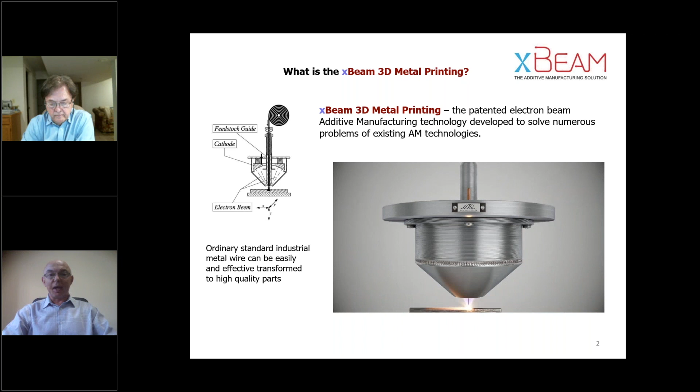Additive manufacturing was initially developed to swiftly make prototypes and design models. At first, only polymer materials, plastics, were used, and their properties were not favorable to real-world applications, even with shortened lead times. So development of metal 3D printing processes became the next milestone in the evolution of additive manufacturing. This opened an opportunity to produce prototypes that had basic properties close to the original parts, providing the opportunity to test prototypes under near real operating conditions.

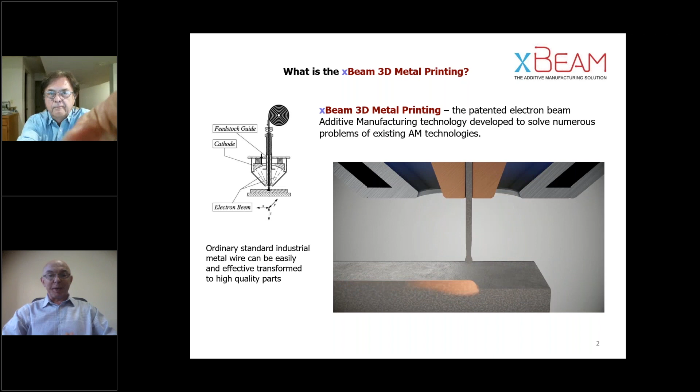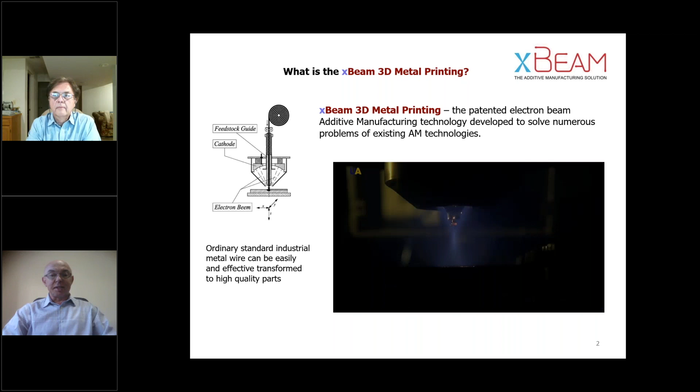Production of original industrial metal parts with lower mechanical properties and less stringent requirements began with medical applications like prosthesis and dental products. These accomplishments immediately generated interest in the more in-depth implementation of 3D printing to actual industrial manufacturing.

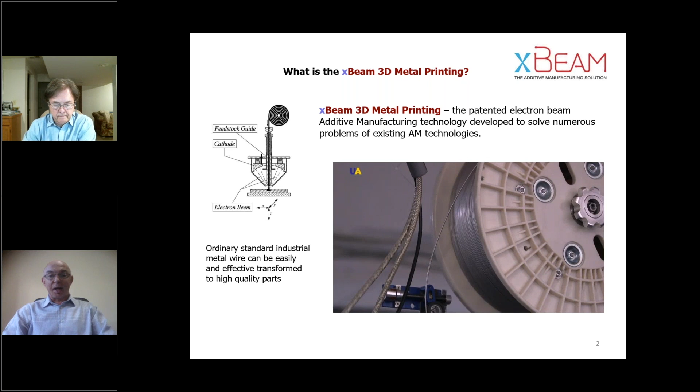Actual production requirements are completely different from prototyping requirements. Manufacturers need uncompromisingly high product quality, simple operation, equipment, affordable materials, and most importantly, reasonable production cost to compete with conventional production methods.

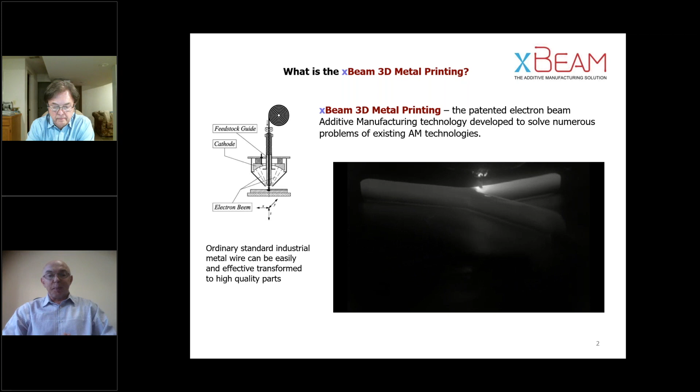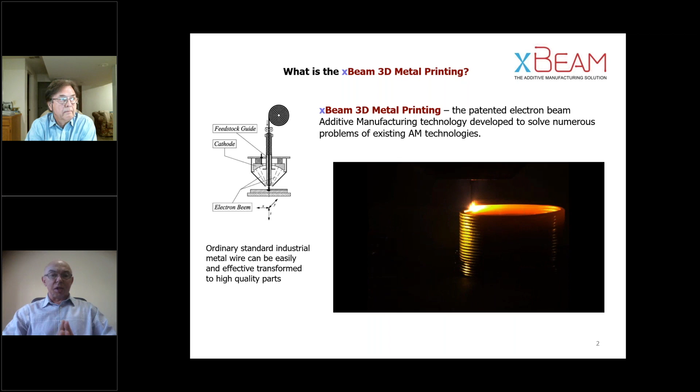Despite many efforts, it has become clear that most existing 3D metal printing methods are not close to meeting these requirements. One process has demonstrated excellent design capabilities, but only for small parts and with very low productivity. Other means show the ability to produce more significant parts with high productivity, but were rough, resulting in a great deal of post-processing. And most of the equipment and raw materials were very expensive, making these processes worthwhile only to a small customer segment where demand for complex shapes compensated for the extra high production cost.

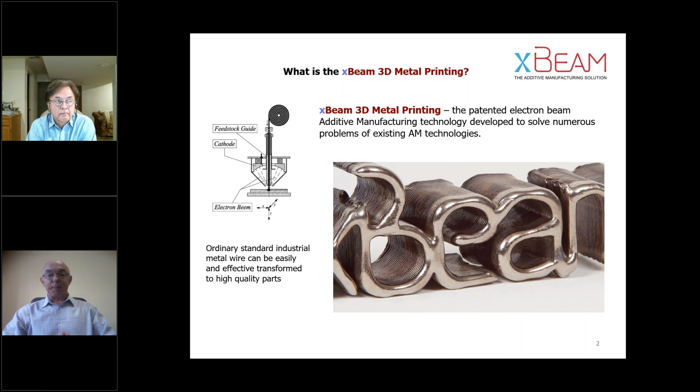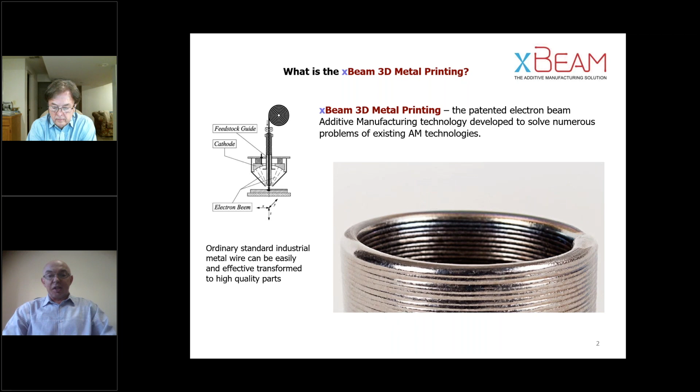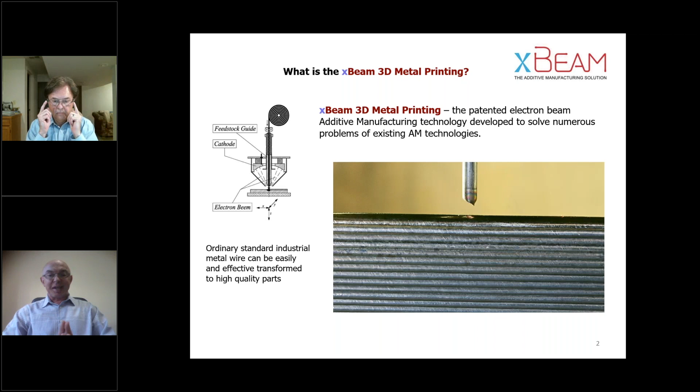From inception, xBeam 3D was developed to meet industrial requirements without compromise. With xBeam, you can take a conventional metal wire from the nearest welding shop, feed it to the system, and quickly produce a final part with good quality that requires minimum post-processing. We created our technology and equipment with careful thought on how it would fit into existing production chains and manufacturing ecosystems.

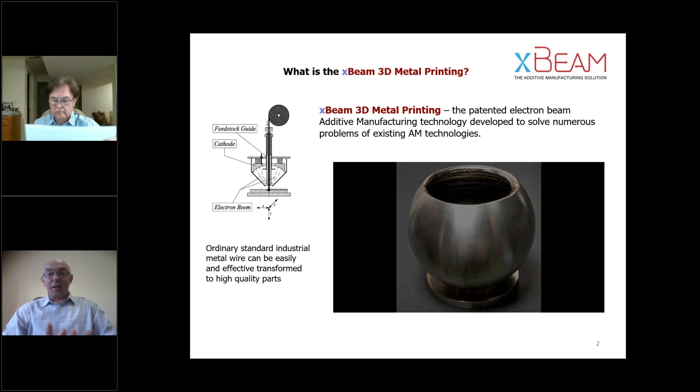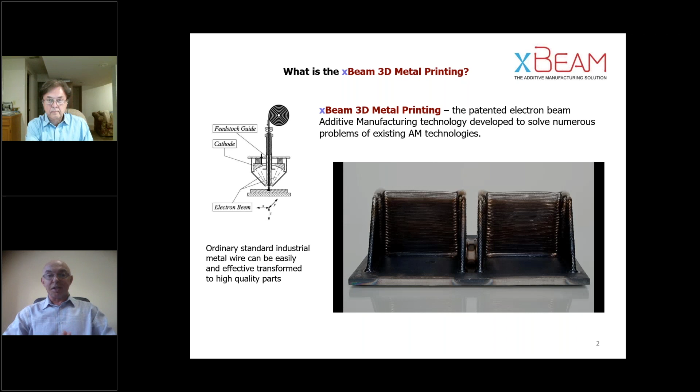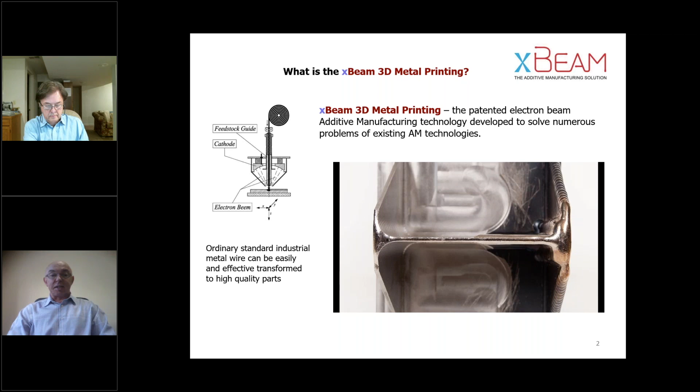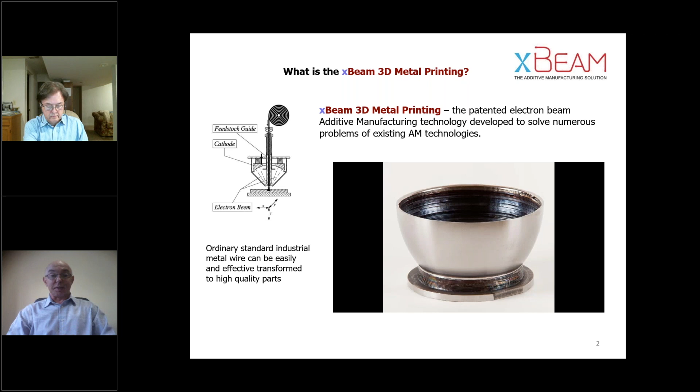Our systems can be operated by personnel with skills equal to that of a CNC machine operator, and 1 hour of operating an xBeam 3D printer costs about the same as an hour of running a CNC machine. Our core competency in the design and development of electron beam systems, combined with our experience in industrial metallurgy worldwide, resulted in the xBeam 3D metal printing technology that allows us to precisely and accurately deposit molten metal using standard filament alloys, producing a wide range of metal parts at a cost-effective price. Our main objective during the entire life of the project was to make equipment that would address the largest base of industrial customers.

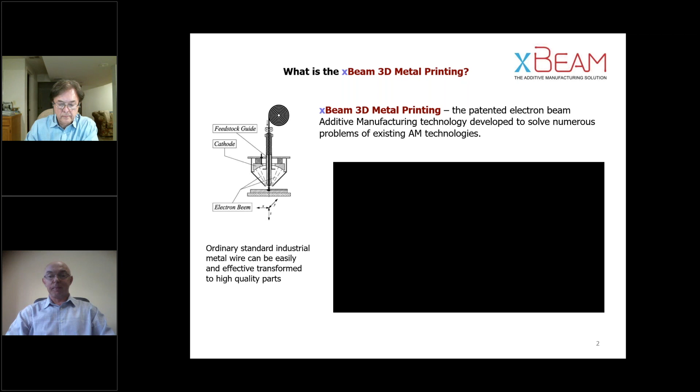Tell us, please, where you stand in the development cycle and who has validated your technology?

Since 2014, when we had only an idea, and until now, we have completely validated the viability of our technology. We have demonstrated several exclusive technological capabilities, including the capability to make high-quality parts which meet the highest industrial specifications. And we have tested and approved the main technical and engineering solutions in our equipment, and all the operating capabilities of our key 3D printing components, like the electron beam gun, wire feeding, motion control, and process monitoring. Based on those accomplishments in a relevant environment, we have achieved a technology readiness level of 6.

All the accomplishments I have mentioned have been vetted by our existing customers and specific prospective customers, each of which investigated the real level of our development before placing their order. In my opinion, signed contracts are the best validation. We have completed 1 contract in 2017, and now we have 3 contracts in progress for a total amount of more than $2 million.

Now we will have to demonstrate the repeatability of our process in manufacturing large parts, and to demonstrate the reliability of our equipment in long-term operations. For this, we will be building and testing industrial prototypes of our 3D printing systems in near industrial environments and making the necessary improvements to reach full functionality and operating perfection. These are our next milestones: to reach the classification of TRL7 and prepare for serial production. These are our goals for Series A, which opens the door to full industrialization and delivery of multiple systems annually.

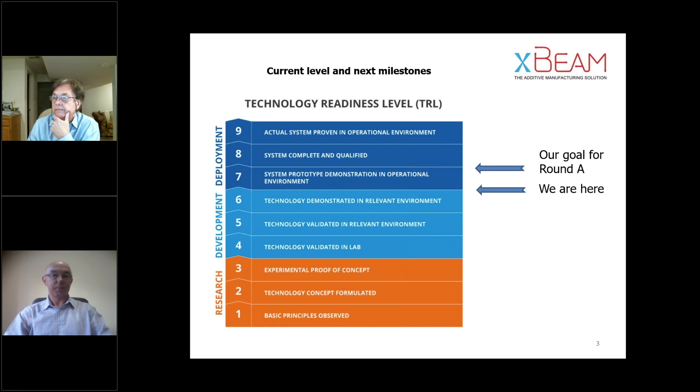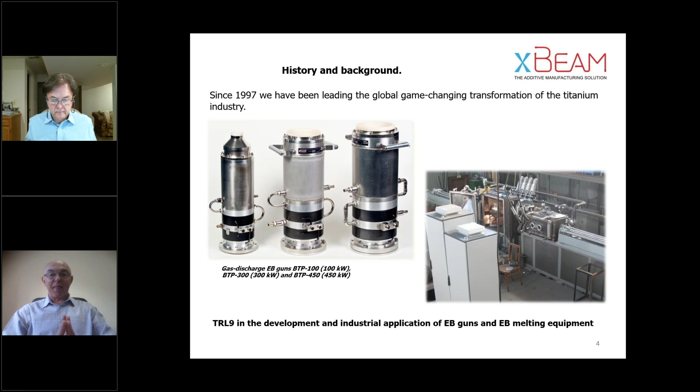Our company was established in 1997, but our history started much earlier. All our business and all our projects spun out from 2 world-famous Ukrainian scientific and technical schools of electron beam technologies and of titanium production. Electron beam guns are the most powerful and most flexibly controlled heat source in metallurgy, opening wide technological possibilities in various applications. Namely, the exclusive technical capabilities of our electron beam guns have become the basis of all our development. At first, they allowed us to develop a low-cost and effective technology for producing heavy titanium ingots, which made titanium affordable for new markets and customers. We then applied our technologies to the melting of other metals, for coating of jet engine blades, for refining silicon and noble alloys, and for other applications.

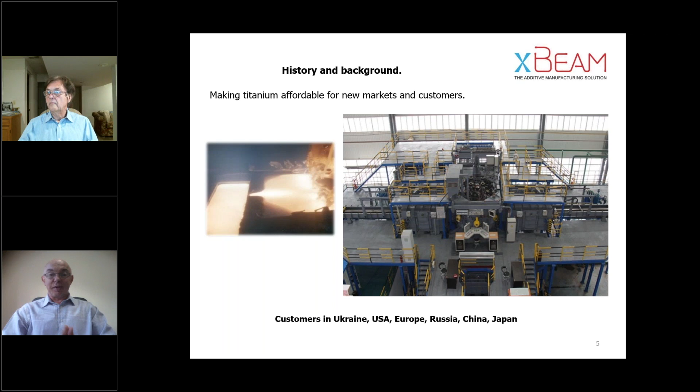In this field, we provided our customers a full set of services, from the design of customized systems up to turnkey installation and after-sales support. We have reached here the ultimate TRL-9 with our electron beam equipment, operating worldwide in real industrial manufacturing.

In 2014, we were introduced to additive manufacturing, and we found that some capabilities of our EB guns are able to solve a number of critical problems of metal 3D printing. So since that time, we have concentrated our attention on this industry, applying our experience and the exclusive capabilities of our electron beam guns to bring additive manufacturing from exotic and exclusive status to established manufacturing practice. Our own funds and the initial seed round of 1 million euros have carried us to our current development point.

Could you please introduce us to the team that's responsible for these developments?

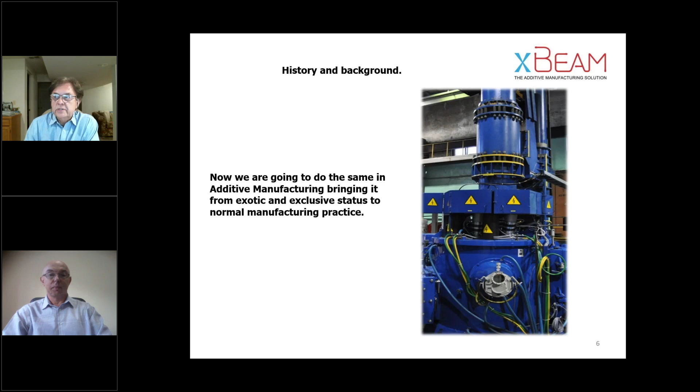Our team is a diversely talented alliance of deep fundamental knowledge. We have 4 PhDs, extensive engineering experience in the development and operation of industrial equipment for high-tech metallurgy, and the creativity of a young generation of engineers. A few additional words about me: I studied in the Department of Aerophysics and Space Research of my institute. This is an important fact because NASA's attempts to develop metal 3D printing solutions for in-space application inspired me to dive into additive manufacturing. That is what led me to doing business in additive manufacturing. Our most senior scientist and specialist, Dr...

Vitaly Melnik is the inventor and brains of our type of EB guns. He has developed and implemented many tens of gun configurations for a wide range of applications, from welding of fine electronic components up to melting of heavy titanium ingots with productivity of more than 1 ton per hour.

Our CTO, Denis Kreminsky, who leads our software development, gained his experience at Materialise, the leading company in software for 3D printing. Our Vice President of Quality and Certification, Dmitry Ivanov, a resident of Norway, for more than 20 years had a business in the global supply of titanium casting. Twice he went the full path of certification for his suppliers, large full-cycle manufacturers. Now he represents Norway and xBeam on the International Standards Organization and ASTM committees for 3D metal printing.

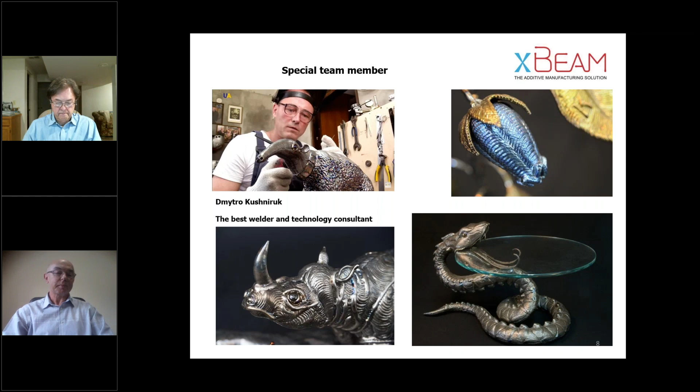And what traction have you developed with prospective customers? Everyone in the metal 3D printing business must be from Kansas. They need to touch it, see it, experience it to believe it. And that includes a thorough understanding of the costs, performance specifications, quality of results, and the economic efficiencies, especially since it involves a new technology. So from the very beginning, we concentrated our promotion efforts on demonstrating our capabilities to produce high quality parts, and to do it faster and for less than other companies in the market.

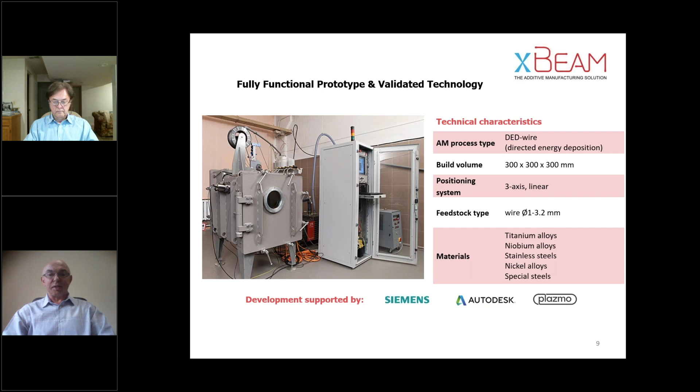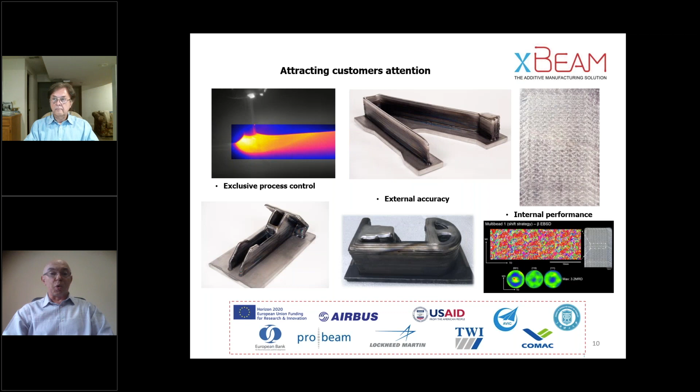We were invited to participate in several European and American conferences, where I had opportunities to present our technical accomplishments. All our initial customers for equipment and exploratory contracts I met at those conferences, where they approached me after listening to my presentation. At first, usually they requested outsourced manufacturing of trial parts to look at what is inside, to evaluate the results and to compare with the same parts produced by others. And then, when they found good structure and properties, they placed orders. I can say that 2 out of 4 of our first customers placed orders without even visiting us or seeing our technology personally. Maybe I'm wrong, and not everyone is from Kansas.

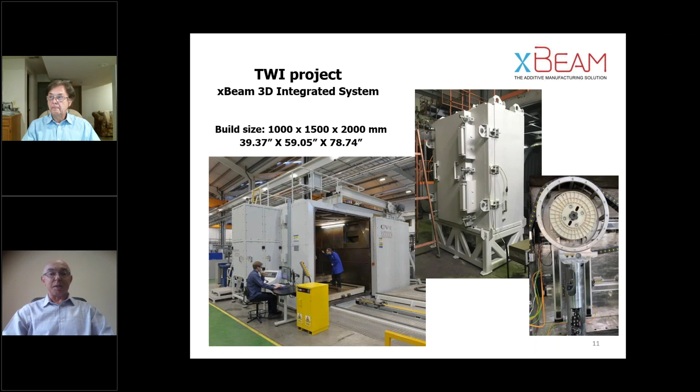We are going to continue to gain traction by pursuing certifications with global organizations, including global leaders in standardization for space and other industries. We also gain traction by participating in the Horizon 2020 European competition, where we have already won a monetary award, and in other international innovation initiatives. We are going to continue promoting the general efficiency of our technology as a value proposition and unique selling advantage to attract not only R&D customers, but a wider segment of the industrial manufacturing sector.

Can you please tell us what specific products you have designed for the market?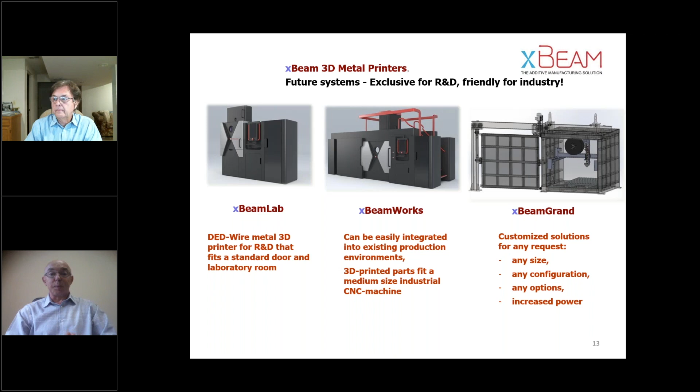And xBeam Grand is a common name of customized solutions, any size, any options, no limits. And what types of parts can your system produce? There are many possible use cases for manufacturing parts that xBeam can produce. Our process is most effective for parts with an average final wall thickness from 2 to 10 millimeters. The good news is that most parts in industry are in this size range.

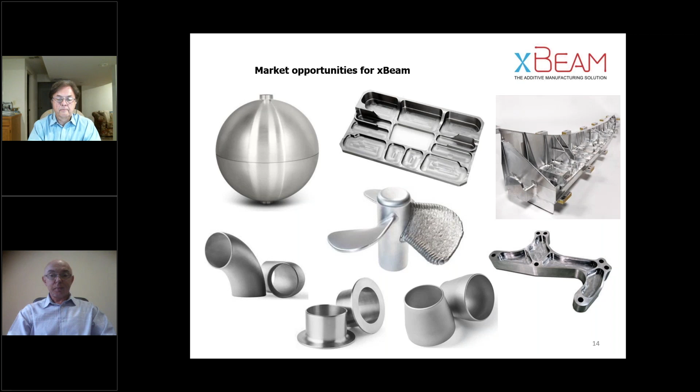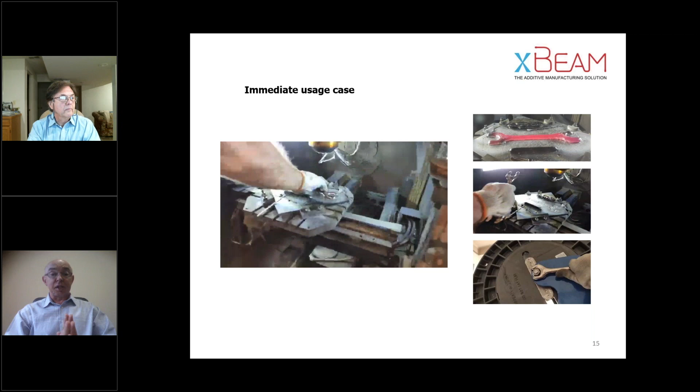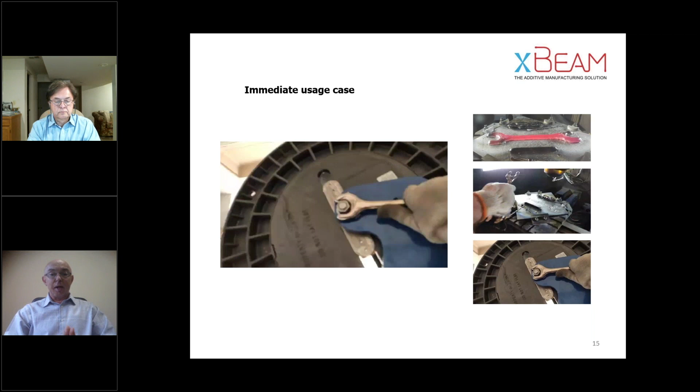Also, xBeam can serve if somebody needs to produce something in a remote location where the means of heavy industries, presses, stamps, casting furnaces are not available. For example, our technology is able to make a real metal part for immediate usage. Practically all other metal 3D printing technologies, both powder and wire, require a substrate for deposition. And this substrate usually weighs more than the 3D printed material. And then most of it must be removed by machining, resulting in additional time and material losses.

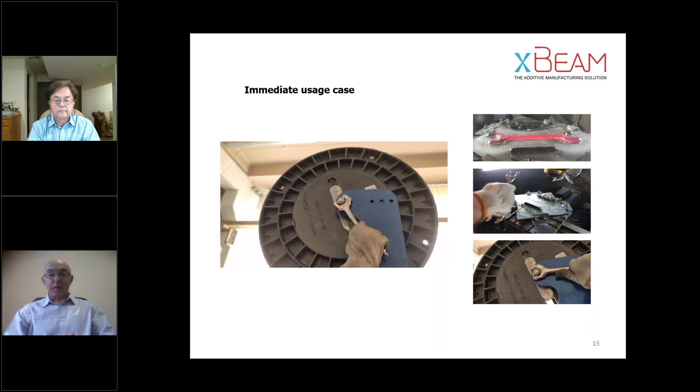In this experiment, we have printed a wrench from titanium wire. It took just about 10 minutes. And then we could take it immediately when the chamber was open, still hot, and use it for its direct purpose. This wrench maybe was not ideal without finishing, but it remained functional. With such capability realized in space, the Apollo 13 story will never repeat.

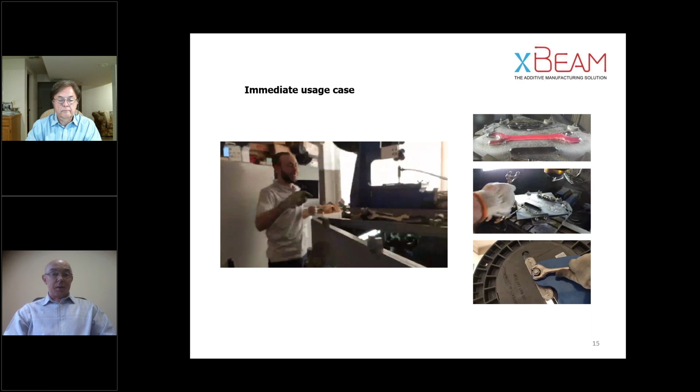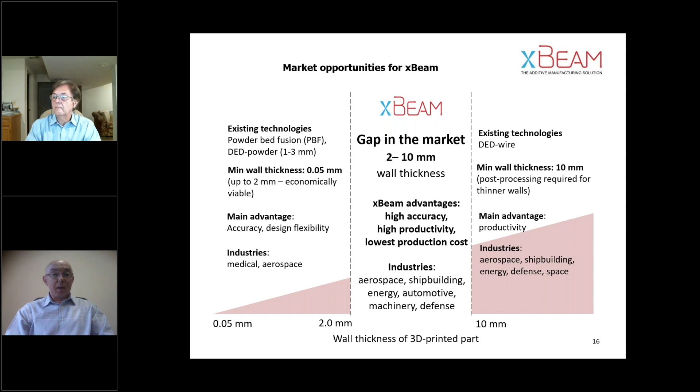Our systems are best suited in aerospace applications, where a lot of complex parts made of expensive materials are used, and high mechanical properties are required. In the oil and gas industries, where again quality, strength, and durability are required. We are also exploring use cases in marine machinery and power and energy applications. I would like to make a special accent on our capabilities for space exploration.

I already mentioned that xBeam was initially developed for in-space application. I'm sure that some of our features are really exclusive for metal 3D printing in space, on the Moon, or on Mars. This is not a direct subject of our round A, but we believe that our nearest development steps will help us to attract attention of this great market and to open an opportunity to make our contribution to space exploration.

As for materials, any material suitable for vacuum processing can be used. We have already tested titanium alloys, stainless steels, alloy steels, niobium alloys, all of which are available as standard spools of filament. To summarize, xBeam can be appropriate in all cases when it is the best of available manufacturing options, either as a normal production facility or as an emergency manufacturing solution, when supply chains are disrupted or become temporarily unavailable.

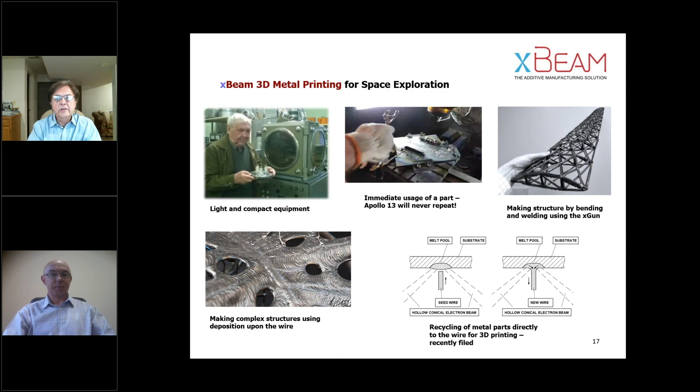Ernst & Young has calculated that $1.1 billion of investment was made in 77 early stage companies in 2019, concentrated in printer systems manufacturing. Who then are your primary competitors and what differentiates your company? There are, of course, companies developing other directed energy deposition wire technologies, and they are also targeting the market for medium and large products manufactured with high productivity.

There are only a handful of companies in the entire market, which is both strange and pleasant. Strange because tens and hundreds of companies work in other smaller segments, and nice because the potential market size in our segment is very large. The small number of competitive technologies is explained by the complexity of developing powerful heat sources.

We differ from our competitors, namely by the source of heating and its capabilities. All our competitors are using heat sources specially developed for welding: laser, electron beam, welding arc as well. Therefore, they are struggling to adapt excessive power concentration to layer by layer processing, where this feature is rather the problem than opportunity.

This is the same as shaving by a saber. That is possible, but a safety razor is more suitable. There is an additional problem for them. They often have nothing to patent, and legal disputes are the norm for many competitive companies.

Our coaxial electron beam gun, the X-gun, was specially developed for 3D printing, providing both high power and the ability to control this power precisely and finely. Our processing systems are patented in Ukraine, USA, and China, and have no close analogs. We have more than 14 years to expiration of our basic patent, and we are adding new inventions to our

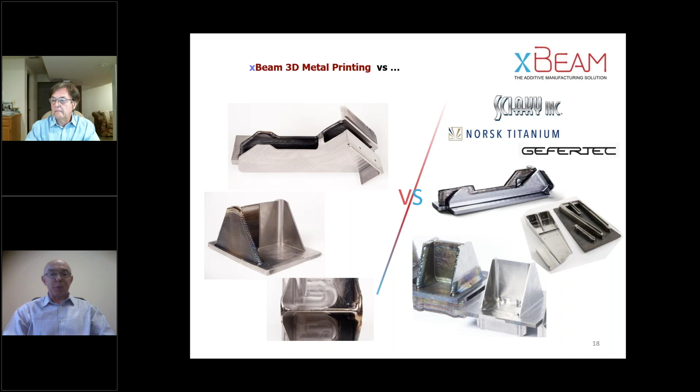IPR. I cannot explain all technical differences in such a short time, but for those who wish, I can answer in more detail in writing or provide a technical presentation. You are welcome. But I can say that some of our technological capabilities, like making overhangs and holes without supports, deposition upon the wire substrate, and multi-usage of easily detached substrates, which I already showed you, have a critical influence on final performance and cost.

After all, the end user is not interested in the source of heating that was used. They're interested in the final result, how much time it took to complete the final product, including all production stages, and how much it cost, naturally bearing in mind the acceptable quality. This is the main indicator in comparing any manufacturing processes. Our development and commercialization efforts are based on such criteria, and we believe that our performance is going to be proven as the best among existing competitors.

And please tell us, who are xBeam's customers and what industries do they represent? Any manufacturer of metal parts is our potential customer. This follows from our mission to make 3D metal printing a conventional industrial technology available to everybody, anytime and anywhere. That being said, each industry has different challenges which may or may not be solved by 3D printing. At first, we expect to attract the attention of those industries and customers that are most interested in a more economical use of valuable materials, in optimizing part designs and improving logistic chains.

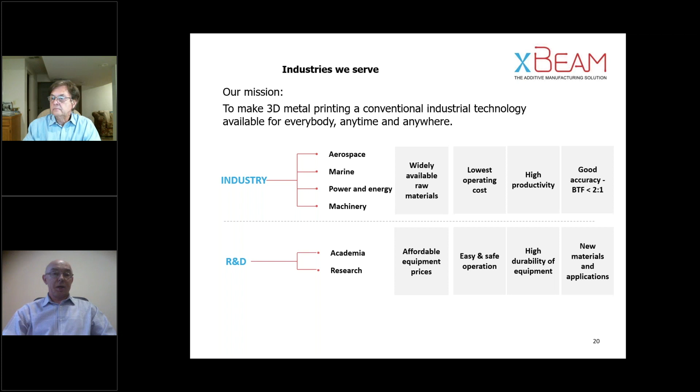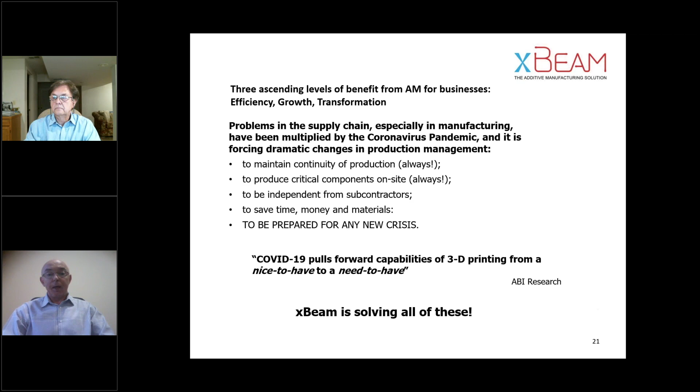Why is additive manufacturing attracting more and more attention from industrial customers? Industry wants to produce exactly what they need, exactly when they need it. We live in an on-demand world today. The coronavirus pandemic has uncovered the vulnerabilities of existing production and supply chains. The demand for final products in many industries has not fallen, and parts and components must be delivered on time to assembly locations. But the global mobility limitations imposed by the pandemic are forcing industrial concerns to adopt alternatives to

solve their supply problems. In addition, spirited discussions have been taking place for a long time about reducing the consumption of material resources in the face of ever-increasing demand. This contradiction can only be resolved in one way: to use existing resources more efficiently and to use them exactly where they are needed. The whole concept of industry degrowth is emerging. And within these conversations and discussions, 3D printing occupies one of the most important places and takes on new relevance.

It becomes a matter of expanding the type of production and eliminating the concept that 3D metal printing is exotic and inaccessible. As soon as 3D printing technologies can prove their capabilities, ensuring that the basic requirements of industry are being met, a breakthrough in the application will occur.

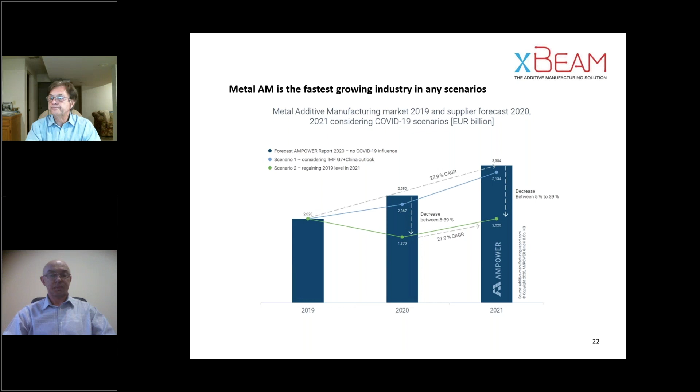What is the scale of the market opportunity for 3D metal printers and services? Metal additive manufacturing is experiencing fast growth in all segments: equipment, materials, and production services. But despite the impressive growth during the last decade, 3D metal printing has been quite slow to replace conventional manufacturing, primarily because of the high production cost of finished products.

This problem has set off an increase in the development of large-scale 3D printing processes with high productivity that are able to reduce prices and satisfy a much wider market demand. According to all analytic reports made or updated during the crisis, this growth will continue thanks to the capabilities of metal 3D printing to meet the transformed requirements of manufacturing industries.

The AM market has been growing in recent years at a compound annual growth rate of 27.9%. Future growth estimates based on historical data and analyst consensus forecast potential overall market value over the next 3 years to be between 20 and as much as 33 billion, depending on variable factors. The pace and impact of changes to feedstock prices, system prices, and finding a systematic approach to new applications will play a major role in the outcome.

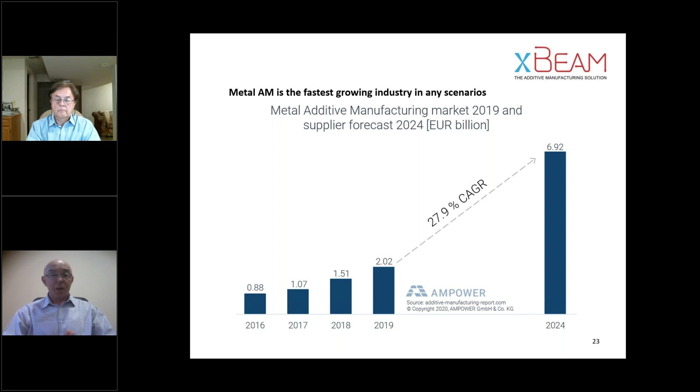I fully agree with the CEO of DMG Mori, a world-leading company both in the CNC machine market and in metal additive manufacturing, who said that the decade of the 20s will be the decade of additive manufacturing. By 2025, if a machine shop has 10 machine tools operating with spindles, they should also have at least 1 or 2 industrial additive systems, leading to 20% of production made using additive manufacturing by 2030, spending billions of euros on this type of technology. Let me also point out that annual sales of CNC machines are measured in tens of thousands of units. And for us at xBeam, this motivates us to relentlessly pursue our mission.

Customers have a much better understanding of where metal additive manufacturing is applicable, how to develop use cases, and how to apply those tools for functional prototyping, tooling, and low volume production. What are the existing primary hurdles to implementing additive manufacturing, and how do you solve them?

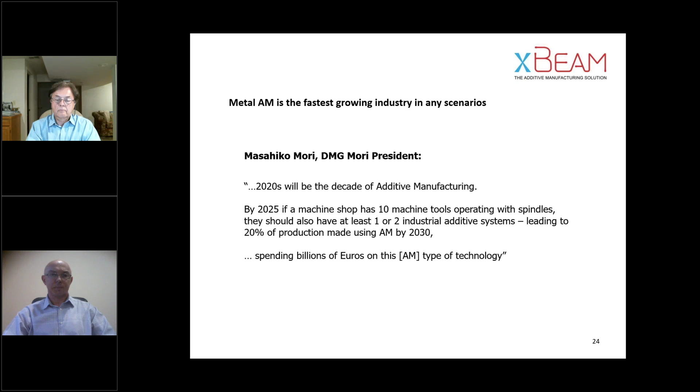But what this means for us is that the market is ready to implement 3D printing in their manufacturing ecosystems as soon as they get reasonable prices on equipment and materials with normal, not ultra high or special quality. Our process provides exactly what the market is asking for. xBeam uses low cost off-the-shelf material, and the cost of our system and its operation looks significantly better than any other systems with similar characteristics. It makes us certain that we are on the right track to meet a high percentage of the market's expectations.

The 3D Printing Media Network reported in early January that the global additive manufacturing market in 2019 generated over $10 billion in revenues. What is the xBeam revenue model?

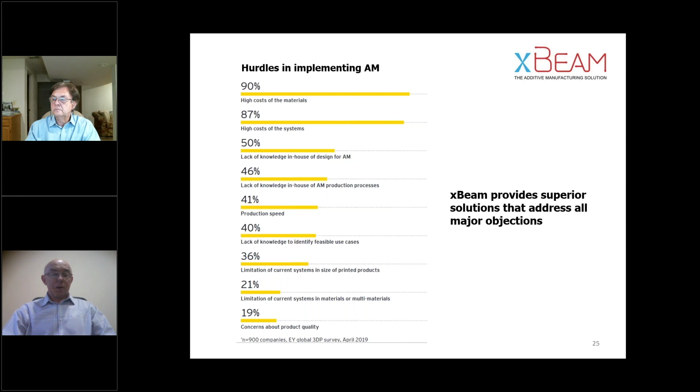We are starting with a revenue stream from equipment sales. In fact, we have already started. We expect to find our next customers among early adopters in the R&D sector, thanks to their intention to be on the cutting edge of technological opportunities, and also customers in R&D have a more tolerant approach to the long-term reliability of equipment. This market segment can order all three configurations depending on industry, facilities, and budget. But we consider universities as high probability early customers of xBeam lab systems, thanks to its moderate price when compared to any other room-scale 3D printing systems and wide technological capabilities.

As soon as we have achieved 100% full functionality and performance under real-world conditions, we will make our systems available to the wider industrial market. When we have built industrial prototypes for testing and evaluation in our facilities and showrooms, we shall immediately start offering services for the production of parts on demand. In any case, these systems must operate at the highest capacities to prove their reliability. So the service revenue model will benefit in two ways: successful operation and revenue during the process.

Over time, we will add supporting services like application notes, technical support and consulting, R&D contracts, which we are already doing, and staff training. All of these will be additional revenue sources correlated to our primary system sales. We are planning to expand our own factory of equipment to produce more parts with time, because we will always be the best experts in applying the technology.

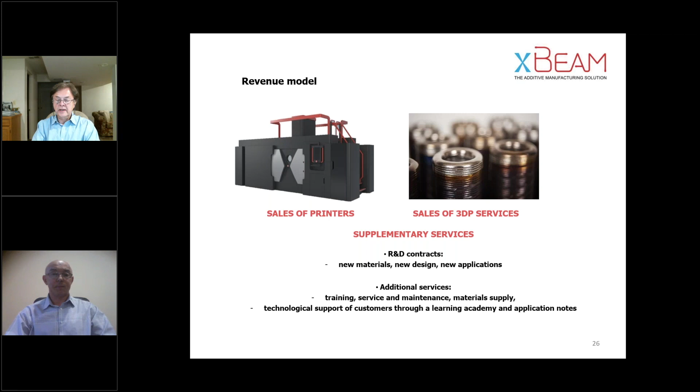Can you tell us a little bit about the financial picture and your milestones for the next 3 years with the completed Series A round?

We believe that market is awaiting equipment and technology like xBeam. Potential demand is high, but we must enter the market with the appropriate readiness level to avoid warranty claims and unintended liabilities. So production and full testing of our industrial prototypes is our first and the most important milestone. That is the key milestone of our next 12 months.

In parallel, we need to reinforce and build our team with additional professionals in sales, marketing, and operations. And we will be developing our own service staff for service engineers, application engineers, and sales engineers. We recognize that most potential customers want to see the equipment in operation before ordering. Therefore, we are planning to organize showrooms in the USA and Europe with our operating industrial systems, xBeam Works and xBeam Lab. We already have good locations and partners for showroom placement and operation, both in Europe and America. These showrooms will become the base for our local service infrastructure.

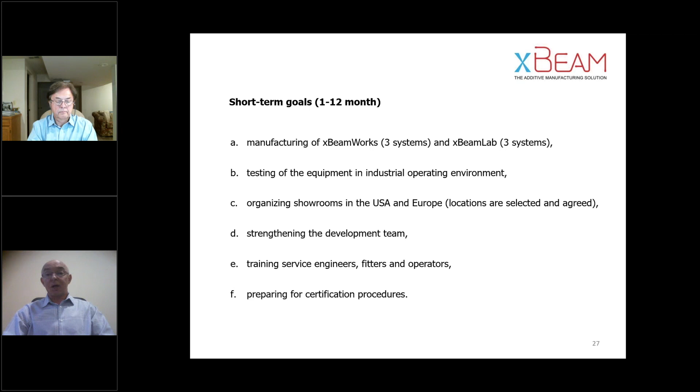We understand that purchase budgets and sales cycles are in planning 1 to 2 years ahead. It means customers engaged in 2021 will return to us with orders in 1 to 2 years. But right in 2021, we expect to secure contracts from potential customers that we already know and have built with them strong relationships around our capabilities.

So the result of our Series A investment will be to build and to test prototypes of our industrial systems in an actual operating environment, make ready for serial production, to establish working showrooms staffed with the appropriate personnel to service and support regional customers. We will staff up our team of developers, managers, and service personnel. And most importantly, we will be pursuing operating profitability over the next 12 to 18 months. With these milestones as a foundation, we can start serial production and delivery of our systems.

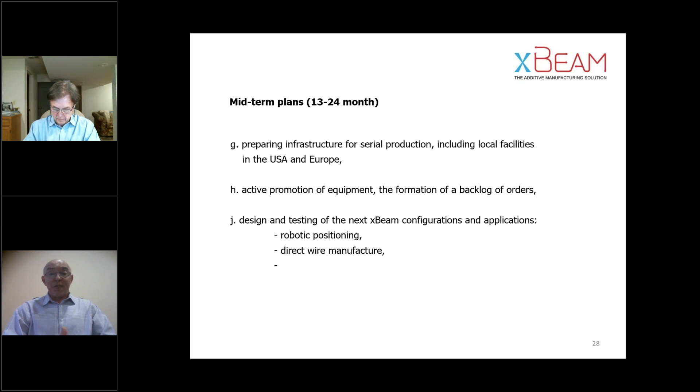Why are directed energy deposition wire processes the fastest growing segment in the 3D metal printing? Because DED wire technologies are most in line with the industrial requirements and commercial expectations of the manufacturing sector. Historically, many developers of 3D printing processes were keen to surprise everyone with some exclusive possibilities. They printed bridges that no one would walk on, printed food, and everything else that could collect a lot of likes on YouTube. Unique parts are also needed, but if you look around, there are very few such details, which means it is difficult to build a business on this. This resulted in a very low share of additive manufacturing in global manufacturing.

I agree with the opinion of the ex-CEO of 3D Systems, one of the industry's current leading companies, Mr. Vyomesh Joshi, who pointed at the following 4 requirements which make 3D production real: productivity, durability, repeatability, total cost of operation. Thus, only technologies which meet these requirements will be viable. DED technology is able to actualize the real-world conditions and needs of manufacturing metal parts with faster and less expensive production for both mass-produced and customized products. Under this condition, this market can become very large. Our aim is to earn a leading position in this market within the next 36 months.

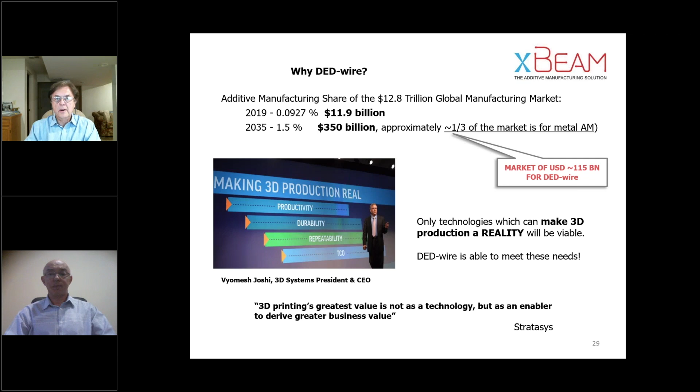And if you could, please tell us, what is the value proposition for your stakeholders? We are sure that the manufacturing market has been waiting for such a technology for a long time, and we intend to satisfy this accumulated demand for a real and viable solution for industrial printing of 3D metal parts. To our customers, we will provide an additive manufacturing solution that fills a void in the market for part size, economic efficiency, technical excellence, and safe and environmentally friendly final parts. For our investors, the value proposition provides an opportunity to enter a fast-growing industry with a revolutionary patented and already validated technology that can replace and/or complement conventional manufacturing.

We provide an experienced and skilled management team that has deep knowledge and experience in real industrial manufacturing, including additive manufacturing, and the strategy that will achieve sales of $59 million by 2024 and drive the company to a projected EBITDA of $23 million. We have not seen in this 3D printing industry any other companies that have achieved this high of technical readiness level of 6 at this early an investment stage with minimum technical and legal risks. Not to be overlooked, we offer an opportunity to join a team of very creative people with open minds in a company that has a soul and drive in the science and in human values.

The fourth industrial revolution is the ongoing transformation of traditional manufacturing and industrial practices combined with the latest smart technologies. This includes smart machines that can analyze and diagnose issues without the need of human intervention. I would like to emphasize that we have not developed just a technology or just machines. We have and continue to develop hardware and software manufacturing solutions, which combine the best physical and engineering knowledge with modern online process monitoring solutions and closed-loop control systems.

On the basis of xBeam capabilities, we are developing the concept of a self-sufficient manufacturing ecosystem of the future, which absolutely fits the definition of Industry 4.0. All that you see in the diagram on the screen is technically possible, and parts of this model are already working.

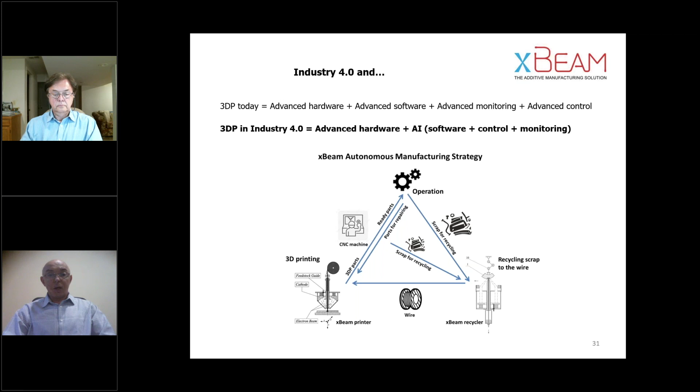Realizing our plan will protect manufacturers in the event of future crises, making manufacturing and supply chains more resilient, and eventually, perhaps all of us will be able to build our own manufacturing ecosystems anywhere.